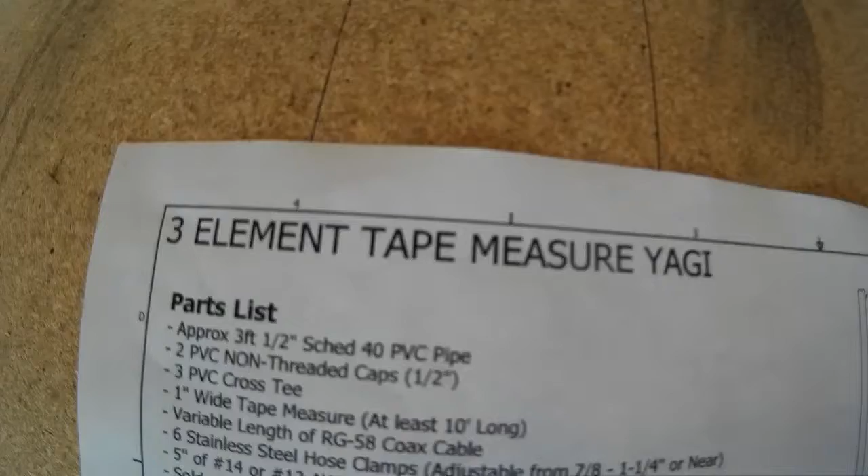Now, my original intention for making a tape measure antenna was just to make a 3-element Yagi. Now, the plans that I have gives credit to these guys here, and that's WB2HOL, AA4XS, K4TMN, and I'll make sure to put credit in the links below.

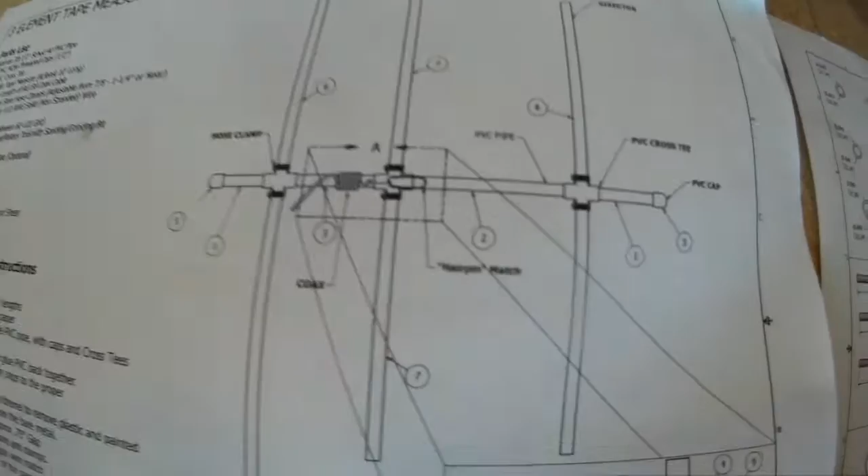I do still intend on making this 3-element Yagi, although I do intend on changing the way that this is attached. They use hose clamps, and I will use a different method for actually attaching my elements. They've got the line for the feed line run outside of the tubing. I think I'll change that and run it on the inside. And here's the remainder of the plans.

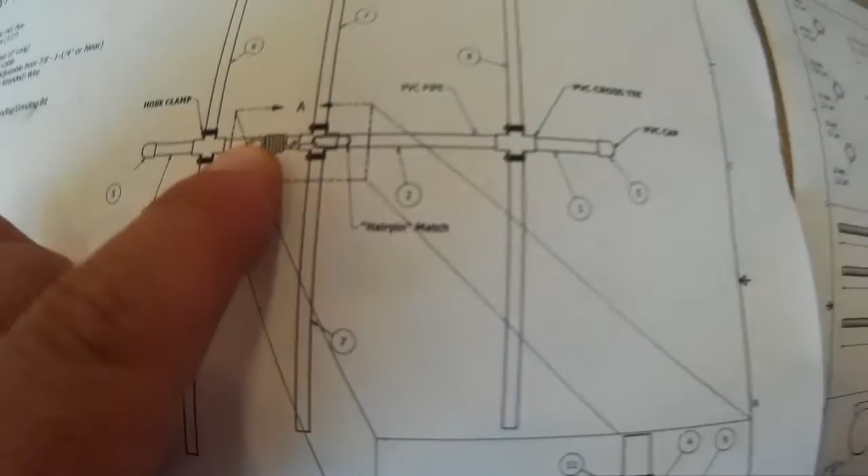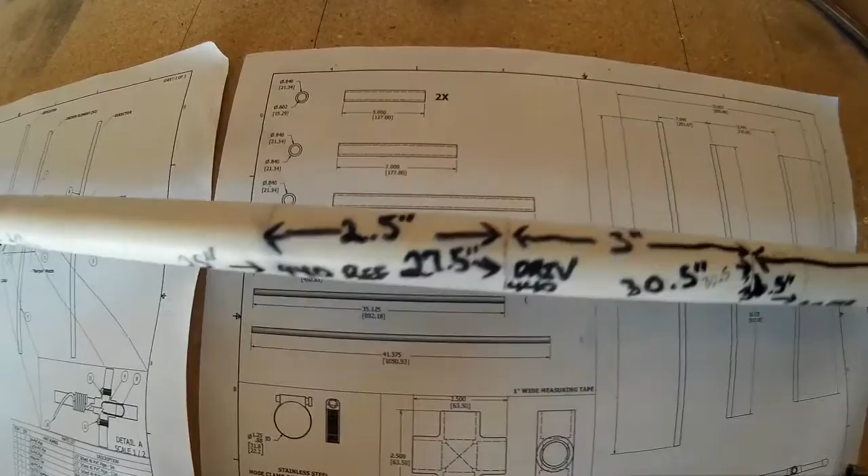And what I actually have done is I found plans online to integrate a 2-meter and 440, so I'd have VHF and UHF on the same boom. And I'll be doing that with the two sets of elements phased 90 degrees from each other.

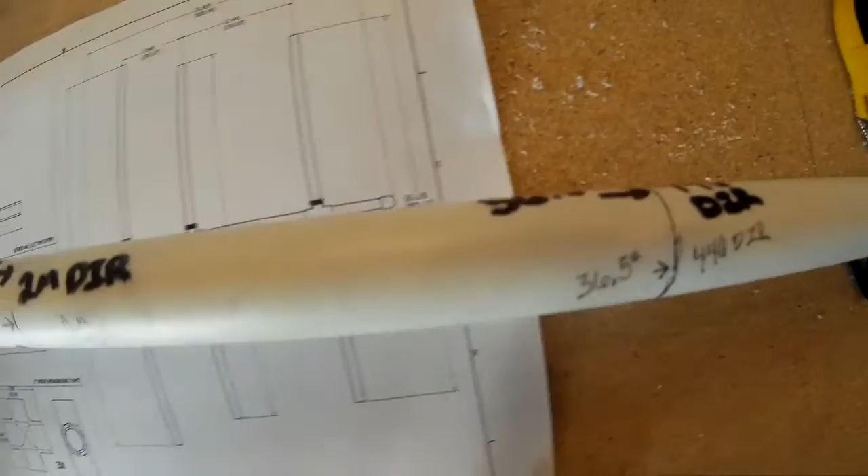Now, I've gone ahead and I've marked up my pipe. This is just a piece of 1-inch PVC, just Schedule 40, and as you can see, I've given myself 12 inches to play with down here at the end, and with that 12 inches, that'll be like my handle, and I have some other ideas for modifying it. And until I can make a diplexer, I'm going to have 2 feed lines coming out of this, so I might actually need something to mount my radios on.

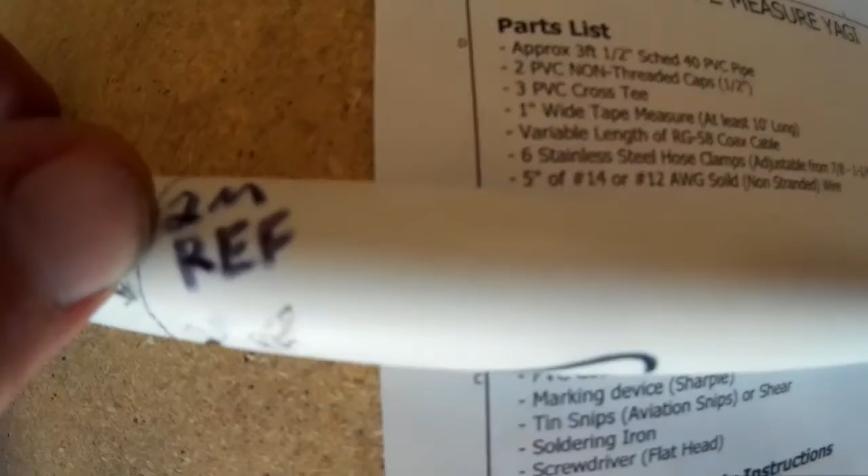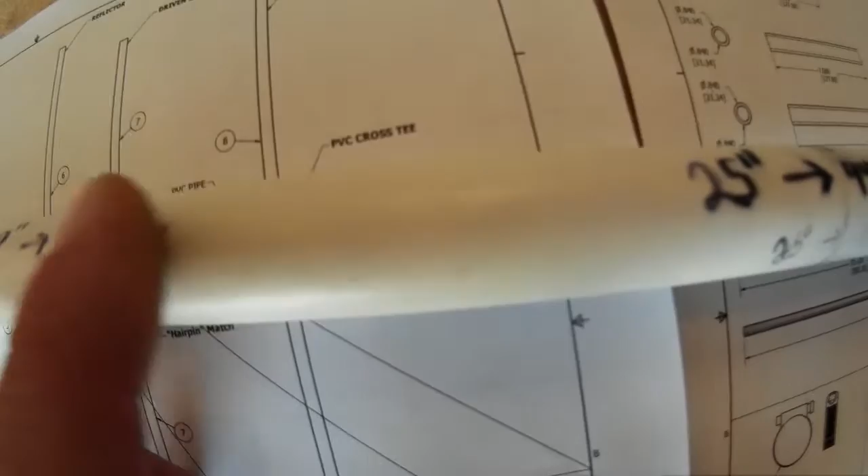But as you can see, the 12-inch mark is where the very first element will get placed, and that'll be the 2-meter reflector. And then at 20 inches is where the 2-meter driven element's going to be. And being as all the plans I've found seem to show a hairpin match, I'm going to go ahead and put that on here.

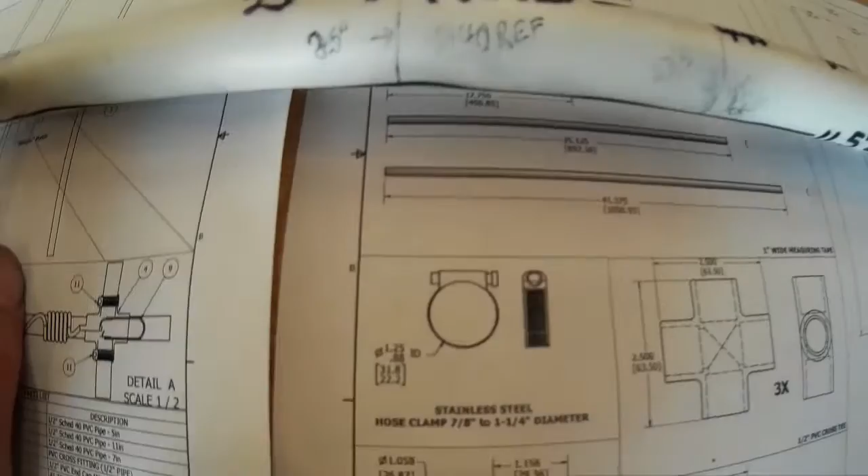So that hairpin match will come up a little bit, and since it's supposed to be 8 1/2 inches, it'll fold to 4 1/4. So what I did then is I just set up my plans to integrate a 440 antenna right starting here with the reflector element at 25 inches. That should put this a 1/4 inch away from the hairpin match. And then from there moving along, now this will be 90 degrees off.